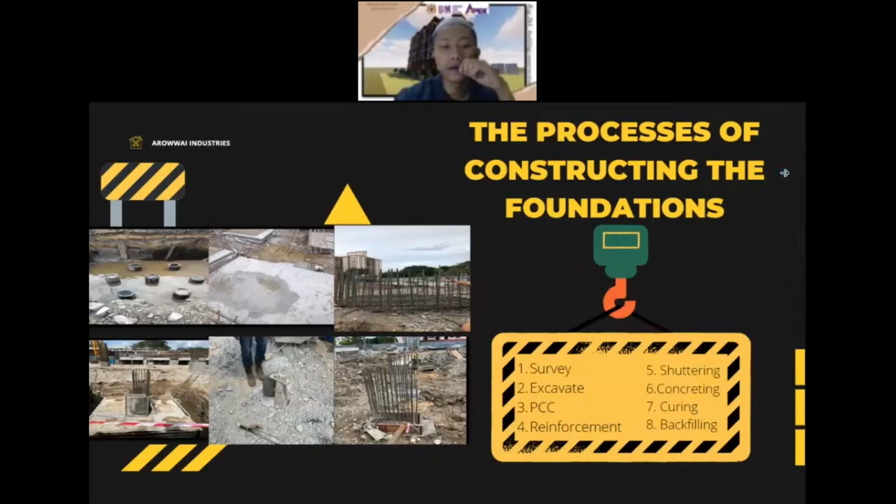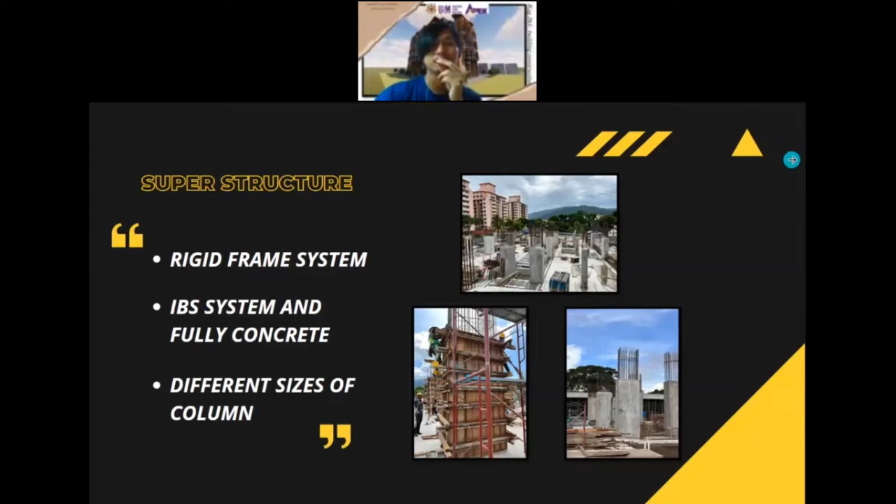So I want to present about the roofing system. Pinang Coastal Hospital uses a double skin metal roof system. A double skin metal roof is a high performance roofing system comprising two metal decking sheets aligned in parallel, one on top and the other at the bottom. The roof structure of Pinang Coastal Hospital is a flat roof.

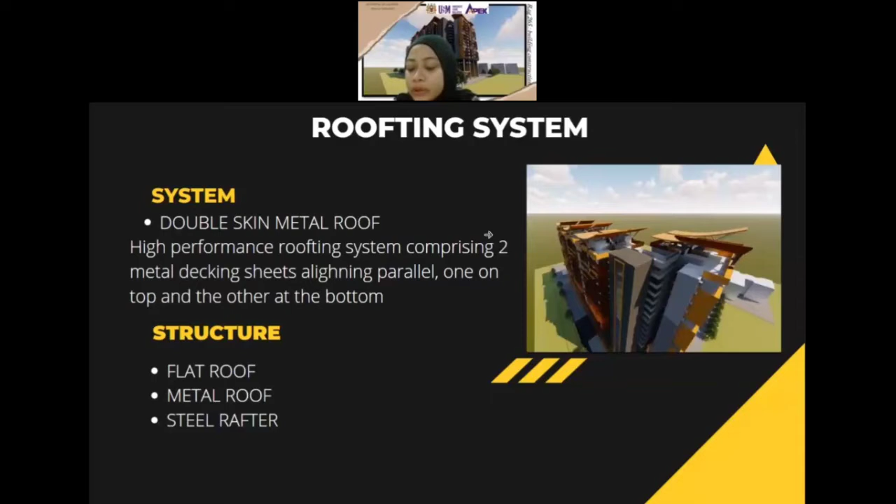The roof structure has a curved shape designed by the architect, and it was recommended to use a 0.48 mm BMT Brosco high tension colorbond metal roof, which has superior strength. In addition, there is a straight ceiling on the roof as well as an RHLT rafter with manufacturing details provided. So next presenter.

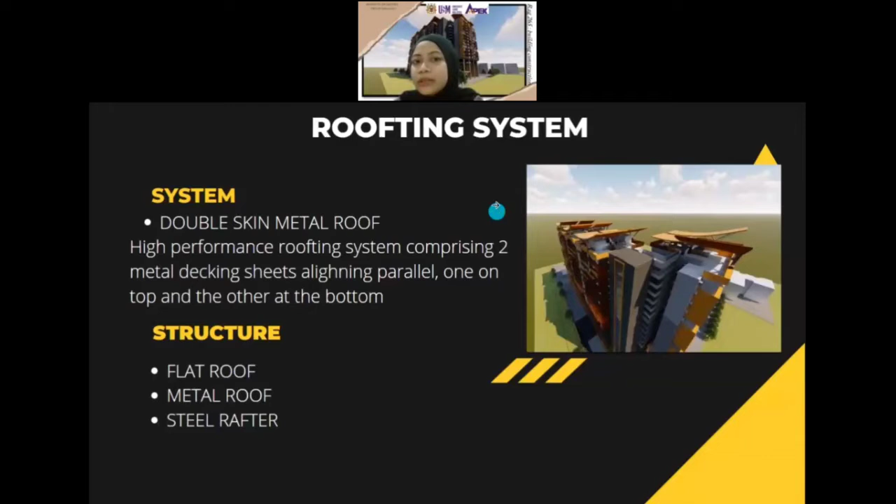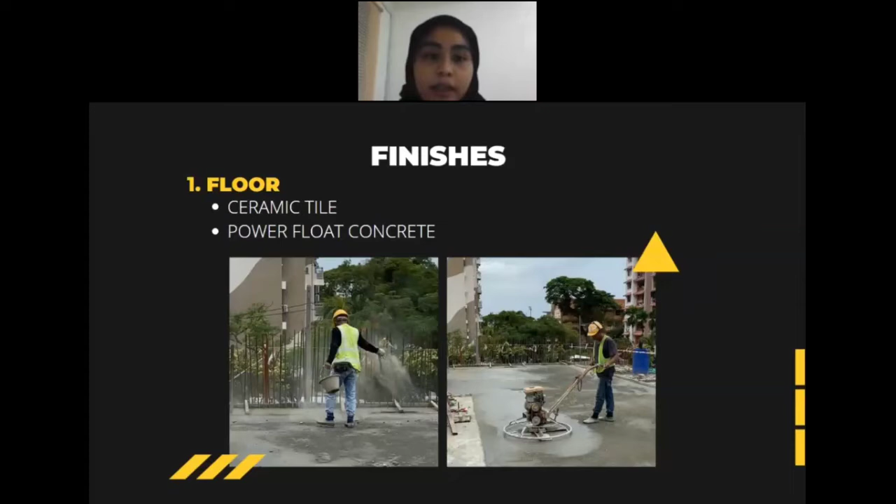Okay, next slide. The wall and ceiling for the construction project are built with concrete and use plaster as the finish. Plaster is used for protective or decorative coatings of the walls and ceiling. Last but not least, the roof type is a flat concrete roof and the finish is cementitious.

Cementitious coating provides high adhesion to the concrete, provides protection from aggressive acid gases and moisture, and also resists chemical attack on the concrete. Cementitious coating also prevents damage from water infiltration and resists mold. Okay, the next presenter.

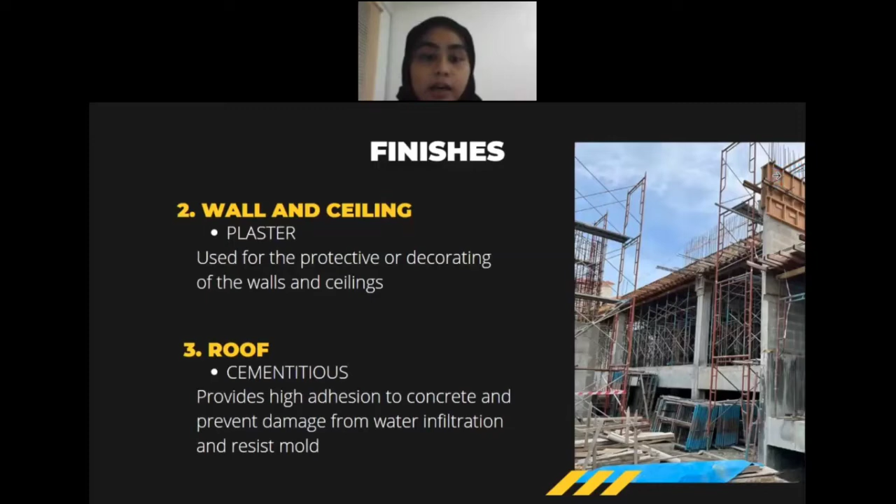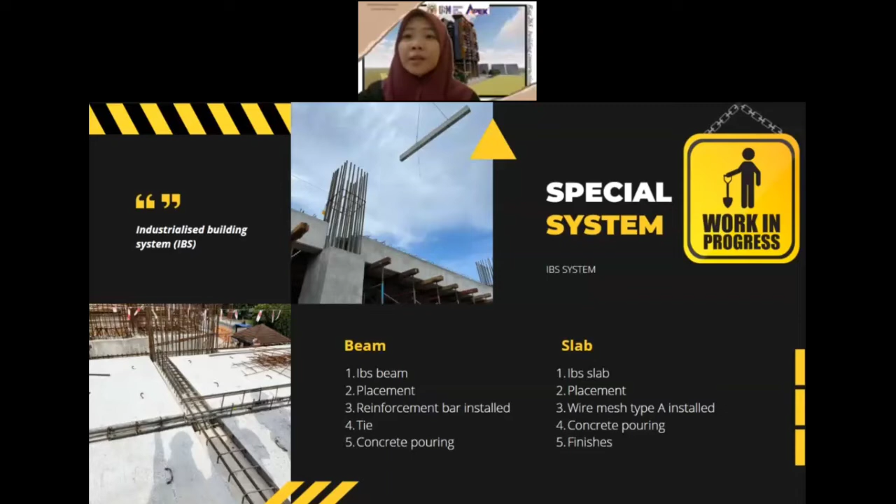So I will cover the special system. For this building, they use IBS, that is an industrialized building system. IBS components are built at the factory, and they bring them to the site for the building construction. For the beam process, first place the beam in position. After that, install reinforcement bars in the middle of the beam and tie them up with wire. After all, pour concrete in it.

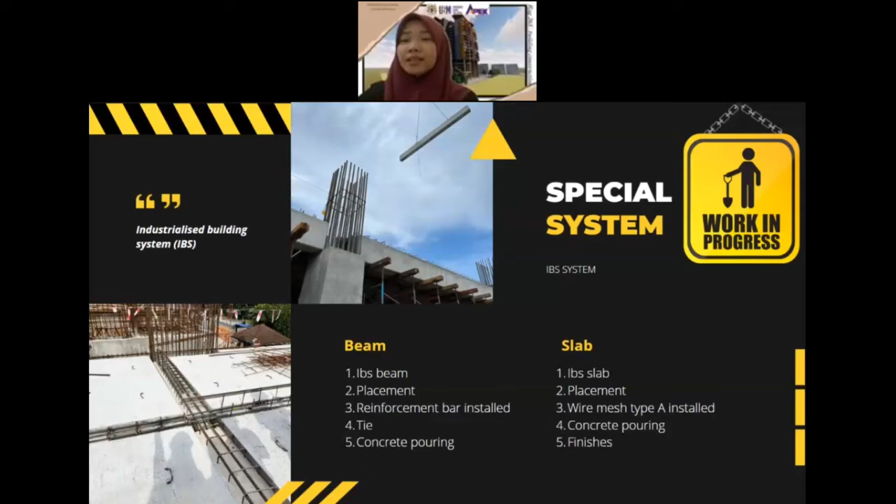Next, for the slab process, after placement of the slab, they put a wire mesh type A on top of the slab. Then they pour concrete on top of it. Lastly, for the finishes, they use a floor hardener on it. Next.

For problem analysis, based on our observation, point number 1 is a messy site. The construction site area is very small, and items cannot be stored properly due to the limited site area. Second is gender inequality in building construction. Third is management planning, because the space for the construction is very small, dense and limited. Number 4 is safety and health: several workers were not wearing harnesses in high areas. And last is change of requirement. Next, I will pass to Amy Azira.

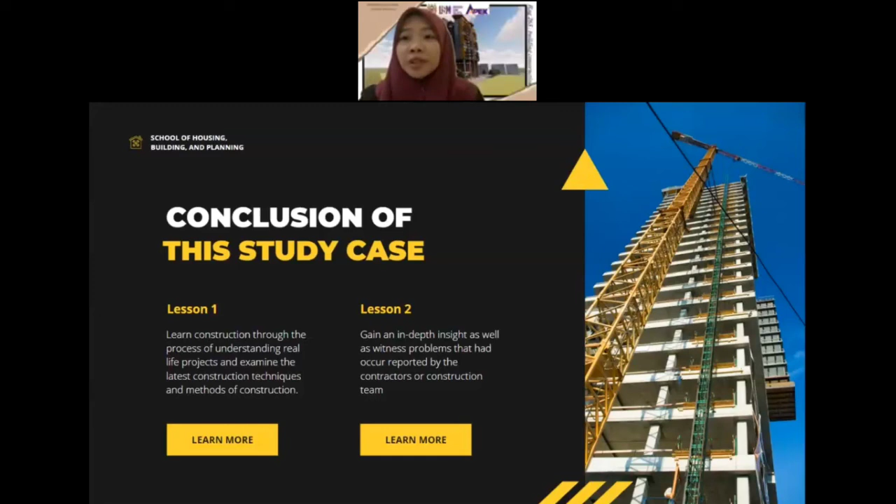So for the conclusion of this case study, lesson 1: we learned construction through understanding a real life project and examined the latest construction techniques and methods. Lesson 2: we gained in-depth insight and witnessed problems that occurred, as reported by the contractor or construction teams. That's all.